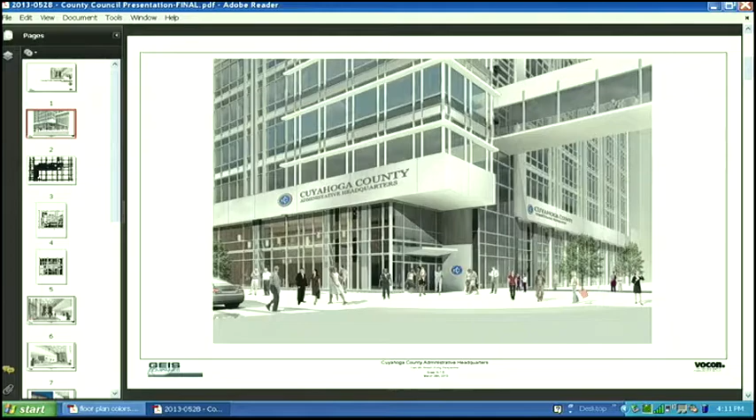So with that, reintroduce you to the entry corner of the building. So we'd be coming in the main entrance, and as we've talked before, we're coming into a 2-story lobby space. The next image is a floor plan. It's a little difficult to read, but at the bottom left, those are the entry doors we just showed you. You'll go through a vestibule, and then you'll be in the main part of the 2-story lobby space with a long reception security desk that URS is developing the design for.

And then we move further, and you see these lines for the security. So everything in gray represents the public lobby zone of the project. And this area that I'm pointing the pointer around right now is the 2-story space. And as you turn and go through the security lines, you're in a 1-story ceilinged area.

Then I'm going to take you upstairs briefly. That's still 1st floor. We'll go to 2nd floor. 2nd floor, where the big X is, that's the two-story space. So you look down into the atrium, or across this railing outside to East 9th Street.

And then Mary Ann? Sure. If you're familiar with the Board of Revision's operation today, the hearing rooms are scattered. They're not very well clustered together, and the waiting areas are also very confusing. So what we've done here is the elevator lobbies are here.

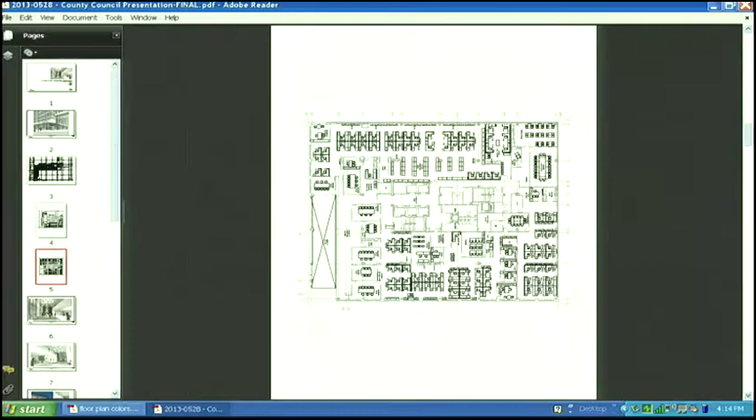Where's the waiting space? I see the rooms. The waiting space is between the big X and the doors to the rooms. There's a long shared waiting room, with seating in front of each hearing room. The big X is overlooking the lobby - it's the second story of the lobby space.

So the people are just sitting in chairs outside waiting to go in? Yes. It also means the public areas are separated from the actual activities of the Board of Revision, which is not the case today. Currently, if you're going from one part of the Board of Revision staff to another, you have to cross back and forth through some of the waiting areas.

Is there a functional reason why this one is turned 90 degrees? It's got a bigger... this one up here? Yeah, just in order - there's actually one down the center too. There's these 2 up at the top, and then that one right there is a little bit smaller, because we have a mix of sizes. Some of the hearing officers routinely handle large groups and some not. The commercial hearings tend to be larger because they bring more staff and an attorney. The residential hearings are smaller, but there's also the possibility to pull an extra chair or two into the room if a group size changes.

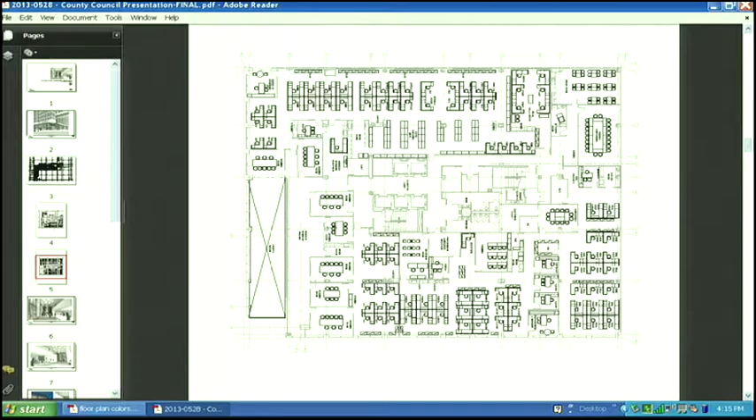How wide is that hallway? To have chairs and sitting and baby carriages and strollers and stuff like that? I can't tell you, I'm not certain how big it is - it's 15 feet maybe.

On the backs of these hearing rooms, the portions that open up to the administrative workspaces - are those key controlled? Yes. So no one can get back there who's not supposed to? Right. Okay, great, thank you.

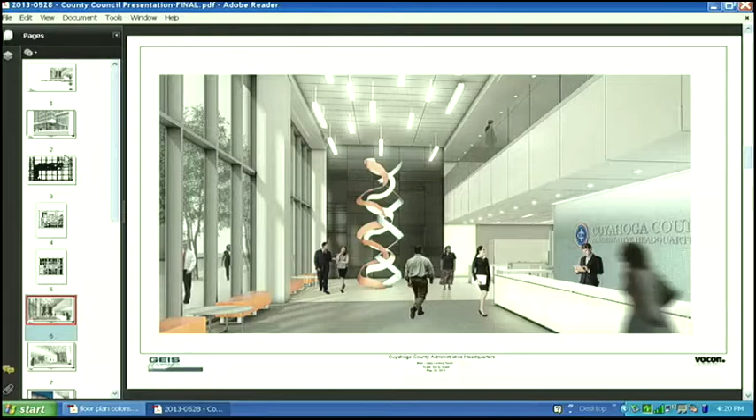And the floor, actually, as you come in—let's go back one more. In the area as you come in, there's going to be a series of walk-off mats. There's a first one in the vestibule, and then a secondary one in front of the security desk. What we find in a lot of these institutional buildings is everyone lays down granite or marble or tile.

And then they roll out the walk-off mats and tape down the edges, and people trip over them. So here what we've done is we're specifying a highly durable carpet that's designed to be a walk-off material, so we don't get the rolled out material and taped edges you often see in public buildings like this. By the time you reach the tile, your feet are dry, and no one's slipping and falling.

Any questions so far? Okay, I'm going to go back.

This is an image just to show you how the light fixtures—this image at the upper right is inset of your lobby. This large photograph to the left shows how those kinds of lights appear from the outside of a building, much as they will in your lobby with a 2-story space.

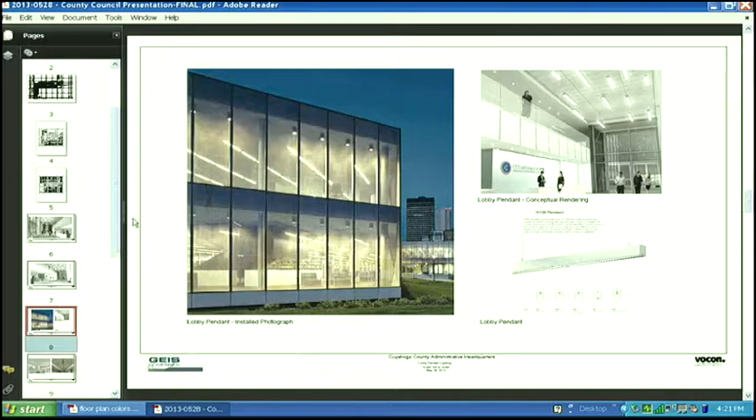They're very simple, linear fluorescent fixtures, very efficient. And then in the lower ceilings, where they're recessed into the ceiling plane, they'll have an appearance similar to these 2 photographs.

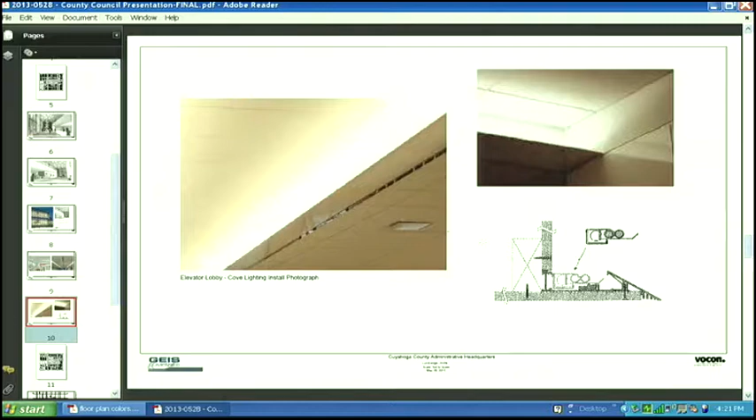And then in the elevator lobbies, just to orient you quickly—wrong image. There we go.

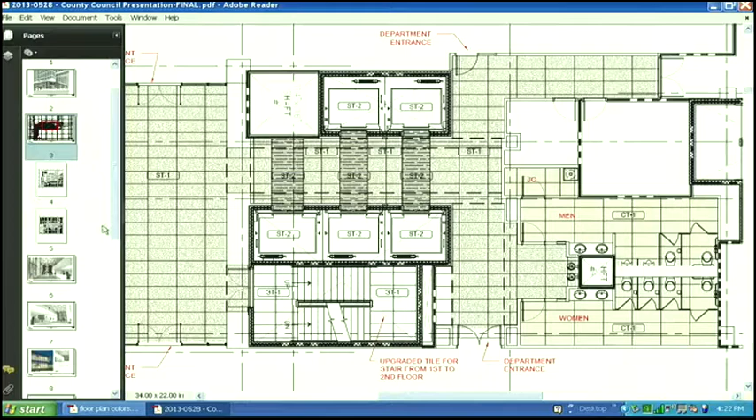In the elevator lobbies, and this is a typical detail at all floors, right where we have these 5 elevators, the ceiling in this area will be popped up slightly, and at the perimeter there will be a cove lighting detail like that we were looking at just a moment ago, like this.

So we have this cove light detail, and the ceiling height pops up at every elevator lobby, all floors. So it's a typical detail.

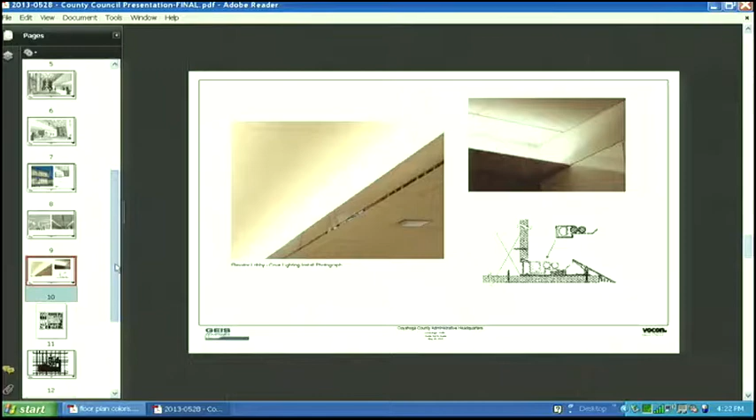Then we wanted to take you up to the 4th floor lobby as well. This will be finished very similar to the 1st floor in terms of the same ceiling tile, the same kind of lighting, and the space has been organized.

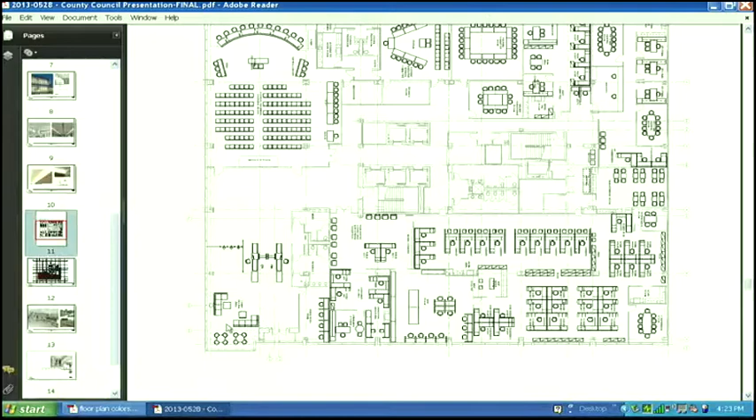This door at the south end is where you come off the bridge. There's a little bit of lounge seating, and then there are the security lines, and then you have a pre-function space outside the county council chambers. And all of this opens out and looks directly onto East 9th Street.

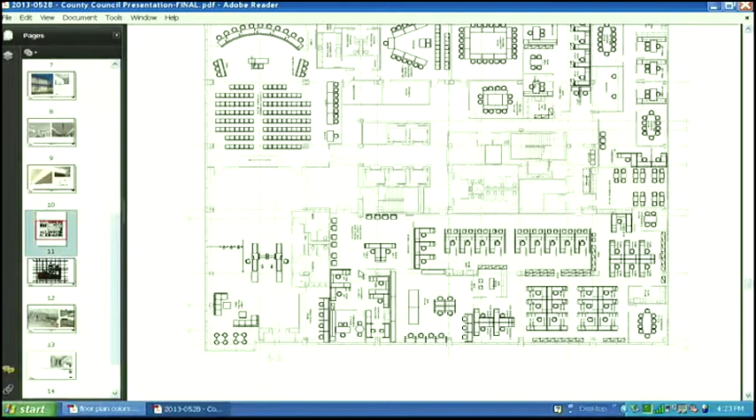Madam Chair. Yes. I understand that we need a waiting area, but I'm a little concerned about the waiting area, people actually sitting here before they actually cross security. So they're sitting there for a numerous amount of time before they actually go through.

We reviewed that with the sheriff, and they have not identified any concerns about that. We can double check with them, see if they have any issues with it. I have an issue. Okay, I mean, that's the purpose of having security, so if you would please bring that up.

So you have people waiting there, and in light of things going on across the nation, they're just sitting there before they actually go through security. Okay. I will follow up with the sheriff on that.

I had a question - did we figure out which way the snow drifts by the front door? If we're in a position where all the wind blows right into the front door, is that taken into consideration? The front door is facing south, so you shouldn't have a problem. Most of the wind comes off the lake to the north.

But I concur with Ms. Conwell, that's a good question. There's an area out here in the Justice Center that you can come into before you get to the security check, but there's a no-waiting area there - you can't hang around there. You have to walk right to the security checkpoint.

Is this the roof? This is the roof, so now we're up at the roof. And this has evolved really quite nicely over a period of time working with URS, the county, and the green roof consultant.

What we've done is, wherever you see the light gray, that represents a hard walkable surface. Wherever you see the green, the lighter and darker green represent planted areas. In terms of these green roof systems, the light green represents a 4-inch planting tray. They come out as 2-foot square modules that simply lay on the roof. There's a number of things you have to do, but they come pre-planted.

The darker ones are 8-inch deep trays, allowing plants that will grow a little taller to live in those. So we've created a border of larger plants that will grow to 18 inches or 2 feet high, separating a series of small terraces. So you kind of have 5 outdoor rooms, divided by a perimeter of higher landscape and then bordered by lower planting materials.

Immediately off the existing stair tower that came through the roof, we've developed a shade structure with a trellis element. We'll see all of that in this next image. It will look something like this - an actual rendering of a piece of your roof with the shade structure, the higher plant material dividing this room from the next, bordered by the lower planting material, with potential for some benches or seating. These other images show the range of plant materials expected on the roof, from the low trays to the higher trays.

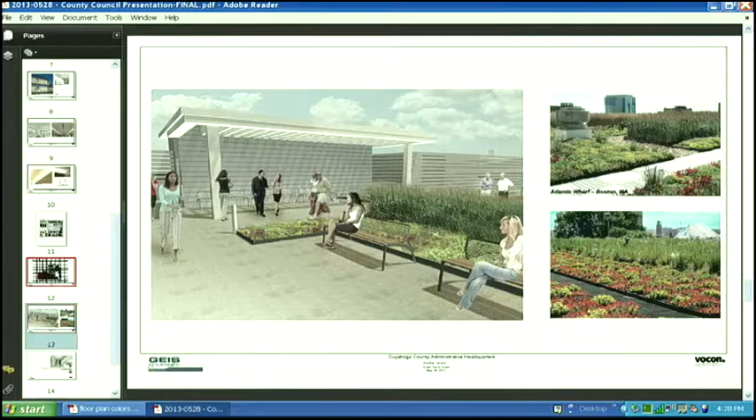The HVAC systems looked like they were almost in the center of the roof. I'll go back to the roof plan. The HVAC units are a combination of things going on here, but this big unit and this one here are the primary pieces. You have some other equipment in the middle. This is stair tower 1, stair tower 2, and the elevator - this one is the elevator that accesses the roof.

So the middle zone of the roof moving north is all of the equipment, and then we're locating the green roof terrace to the south, the southern third of the roof. It's separated by a screen wall from all the equipment, so you're not actually going to look at it. You may see it peeking above the screen walls, but you're separated from the equipment.

I guess I was under the impression that the original drawing showed the northeast corner was where all the HVAC systems were going to be, and that we were going to have a more dominant presence with the green roof. This is down to a third, and I thought the renderings shown to us had it almost half or more dedicated to the green roof.

This represents - at least in the time I've been involved with it - the general amount of square footage of roof dedicated to either green or terraced elements. Over the period of time, the core has been developed so that the units land above where the shafts make the most sense. So there's that coordination, and we'd always favored the south side because that's where the sun and the potential views were, since there's a tower to the north.

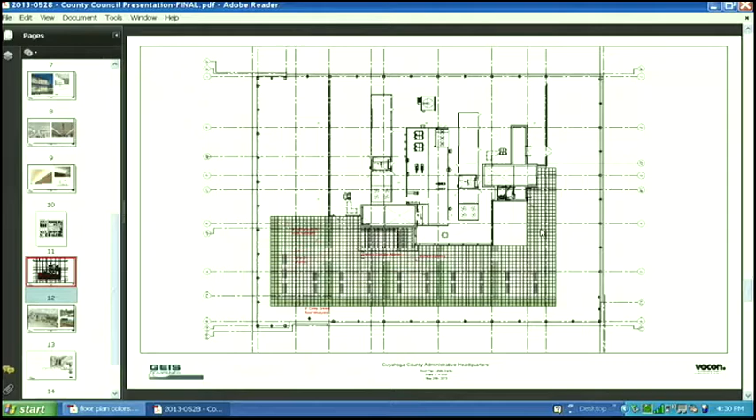Is there maintenance cost in connection with the plants, and do they rotate, or is it an expensive proposition? The plants selected for this are mostly succulents, and they can withstand the really dry, sunny conditions on the roof. So they're expected to do pretty well up there with very minimal maintenance.

I somewhat vaguely remember some of the concepts Councilman Schron's talking about. I thought that right now this green space ends a considerable distance from the edge of the building. If I had to guess, we're probably 25 feet from the south and 10 feet from the west. We're about 10 feet from the south edge. I guess the point was, I think we were under the impression this area was going to be much larger than it is.

The other element we were working with, more for safety than anything else, is that along the perimeter there are a number of tie-off points associated with window washing equipment. There are elements that poke up through the roof, so in developing this and balancing the design, we chose to create a perimeter maintenance zone and brought the terrace back from the edge. To balance that visually, we bordered the perimeter with deeper trays, which allow for higher plantings and disguise the parapet wall. There are a number of technical things that happened as we developed this, and we balanced all those issues to come up with the design we're showing you today.

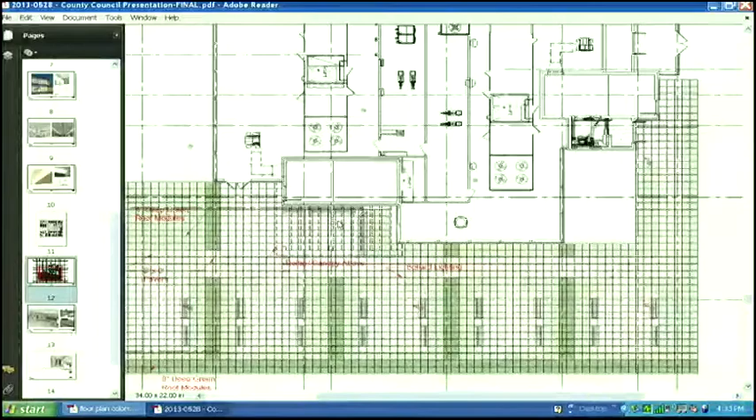How many usable square feet are there going to be on the roof, and are any of those usable square feet part of the basic rent package?

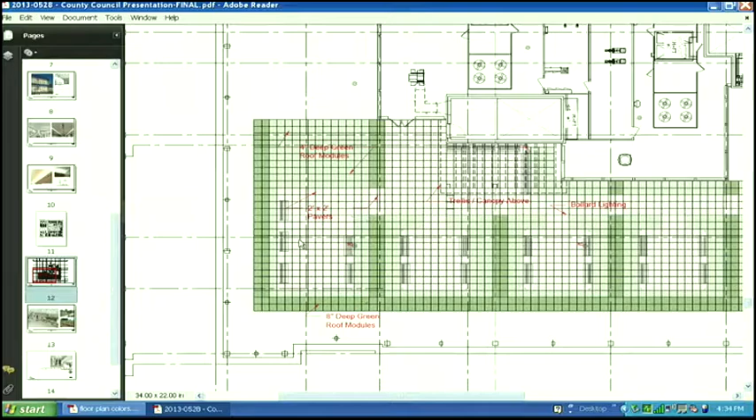Each of these, and we'll divide this so you get a sense of scale. Each of these first four rooms to the east are 18 feet by 18 feet, so they're a nice sized terrace. The one to the far west is 30 by 20, a larger terrace space. So overall we're looking at 2,000, probably 3,000 to 4,000 square feet of paved area, and the balance is green space. In terms of the walkable area to the green area, it's almost a 50-50 split. We could run the numbers for you.

The second part of your question was how that's factored into the base lease, and this square footage is not included in the rentable square footage for this. One thing too, there's been questions about the square footage—this is very similar to what was shown in the renderings before, just reconfigured a little differently. So the ratio of pavers versus planted area is the same compared to what was shown in the renderings too.

The west wall, is that still glass? Up here in this rendering we're looking at on top? I think at one point you'd shown us some drawings in the renderings of glass on the top.

And you had the crown on... the screen wall that extended. It started in the lower left-hand southern corner and went all the way up on the west wall, I thought. No, it does not.

I don't have a full image of the building here, but that was at the beginning, several months ago when we started this. There were two kind of conceptual approaches to the exterior, one of which did include the glass screen wall that extended beyond the roof line. And then there's the current design that we're working with that involved the metal frame.

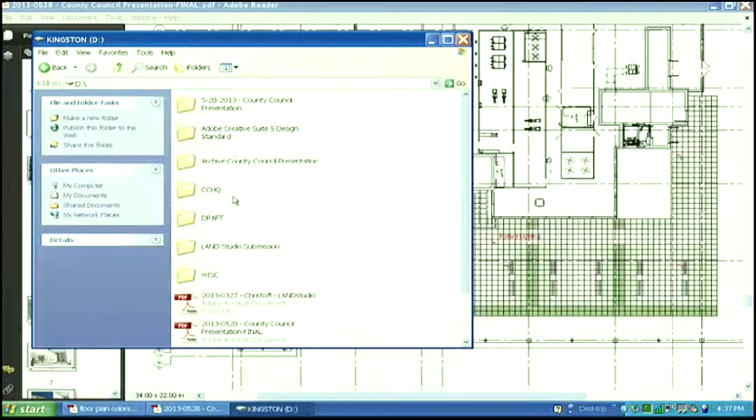Yeah, you showed us a picture of it. Or maybe it wasn't.

The very first one that you're referring to - but this is the design we've been showing you over the last couple of months, and this version involves a metal frame around the glass curtain wall area, including at this corner. What you're remembering was a scheme we were looking at the same time that would not have had metal panel here, and the glass would have kept going past the roof. It was part of another design concept.

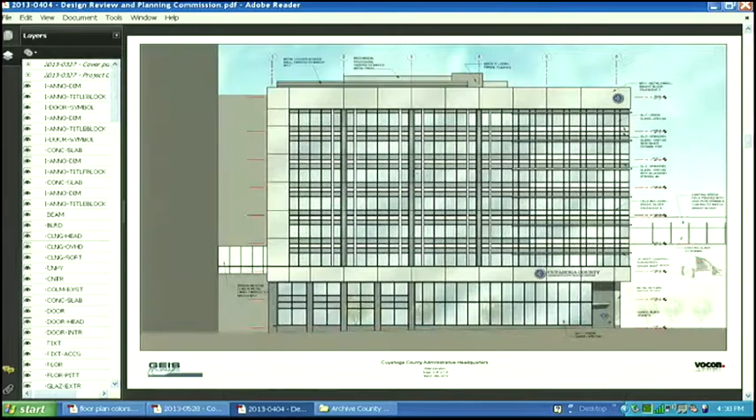But this is - I'll go back. Here we are. So this is the way the building looks right now, what we've been looking at over the last couple of months. It's different than what you're talking about, but it changed several months ago and went this direction.

I just thought that was a big deal in terms of the ability to use the roof, that would break the wind or something. I don't know if other people remember it that way, but...

At the time, I remember Jack saying he'd gone to a building in Chicago or somewhere, other buildings that have plenty of rooftop areas where they have glass walls, so you can actually utilize that space as opposed to having it blowing across the top.

Right, and I think in order for it to be most effective, we would have needed way more of that than we were showing in that original concept rendering, because it was only just at that corner.

I thought you showed the whole south wall and the corner. No, it was just the corner of the building. I don't mean south wall, I'm sorry, the west wall and the corner. No, it was just the corner. Yeah, remember that?

So that's gone. You got your - it looks like this. Are you off? Okay. Thank you, Mr. Rogers.

So no one's going to be able to walk up close enough to look over? You're going to be 10 to 12 feet, and in some spots, based on that one drawing, 20 feet away from the wall. That's correct. I guess that wasn't my expectation of how we're going to experience it upstairs. Glass, you don't walk outside. I don't know that I'd want it.

You had designed the one down at the east bank of the flats too, I believe, as I recall. Looks like it's a little more engaging to look out at the water than this would be, as far as from the edge. This is actually a much larger roof terrace experience than the Flats project. The Flats project was simply one corner of the roof. This is definitely, I think, a bigger vision. The idea is that more people would utilize it on a daily basis.

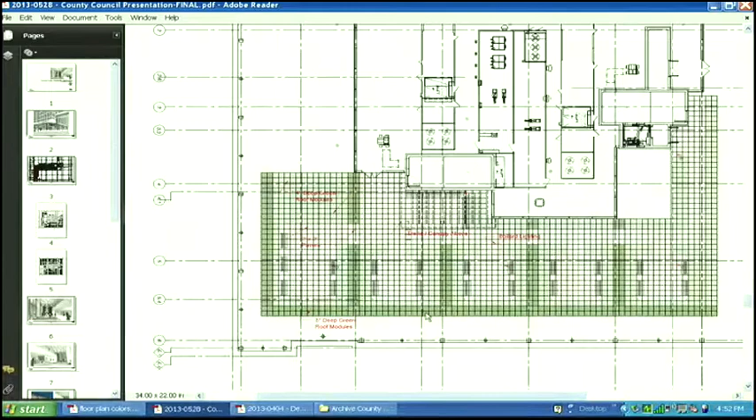I think we still go back to the same question, Madam Chair. Oh, go ahead, Mr. Duran.

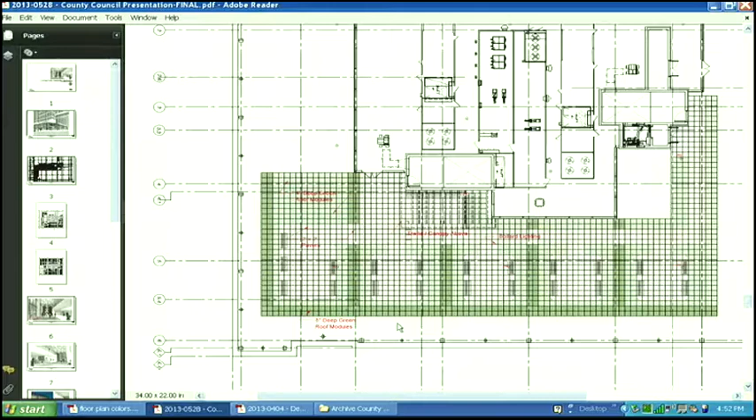Is the public going to have access to this, or is this strictly employees? The roof access is intended to be for county employees only, and like most doors in the building, you have to swipe to get through, so there's a record. Even if you get to this level, you can't let yourself outside unless you're a county employee coded for roof access. The intent is also that it would be available seasonally, so there'd be a certain point in the year where employees could not access the roof. Where the smokers going to? No.

Madam President, what I'd like to offer council is an opportunity. I want to revisit some of the things I've heard, and look at some of these aesthetic issues and what the options are. Because we're talking about the building as it is, but the building as it is does not exist yet—it's a schematic now. I've seen some things I want to look at that I haven't seen, quite frankly. I can't speak for council, but I think we've got to figure out a way to make sure that when there are aesthetic alterations, they are not presented to council as a foregone conclusion, a fait accompli, without some discussion about options.

I just want our team to go back and talk about the options, and then represent to you what options are still doable under our current budgetary constraints. And if there's a cost for doing certain things differently, we'll cost them out.